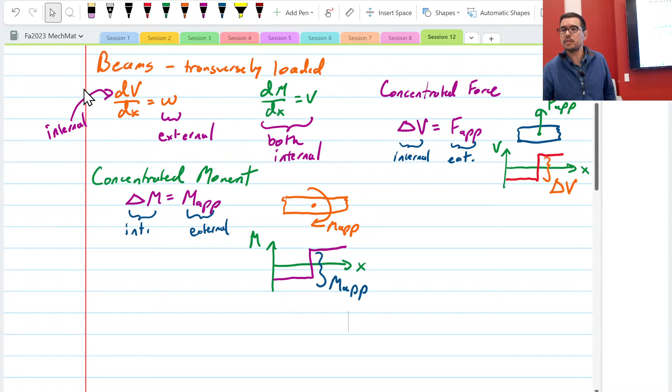This technique allows us to use what we call a graphical method, or we use the differential and integral forms of these equations as we're moving along. Okay, so let's do an example.

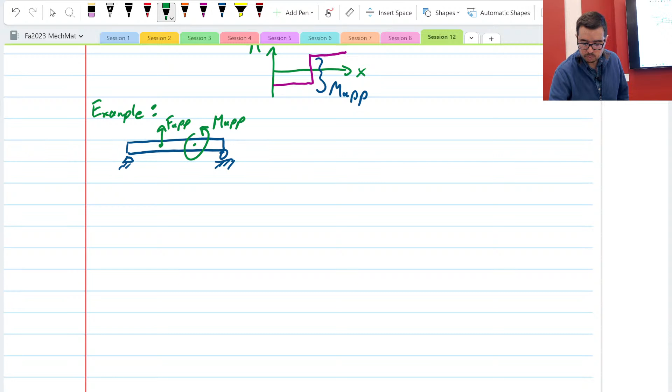This is one of the homework problems, and I might not solve every little detail of it, but it should inspire and help with this approach. Which way? Looks like this is - not completely to scale.

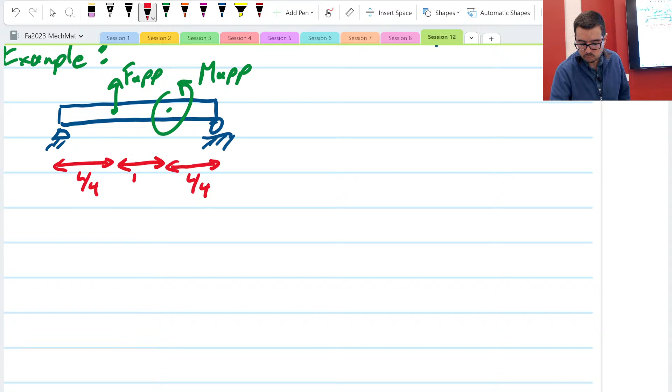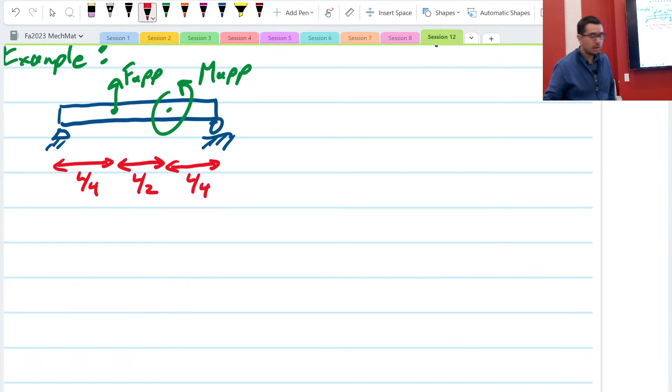So it has length L, and it has a bending moment applied. Notice this is in which direction? Counterclockwise direction. So that means if we look at this formula we have right here, this will have a negative delta M, because it's in the opposite direction. Please note this.

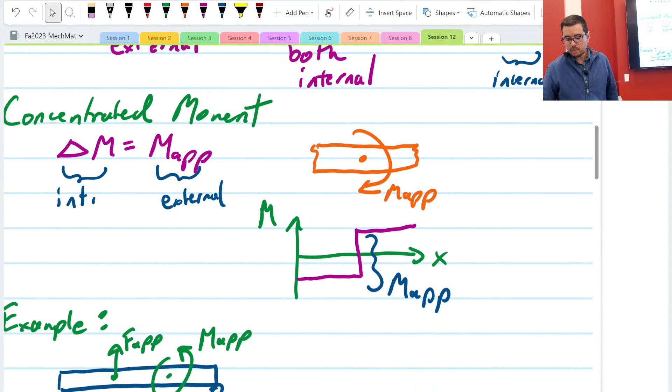Now we also have an F, and this is positive right here. So this will end up giving us a positive jump in the internal shear force.

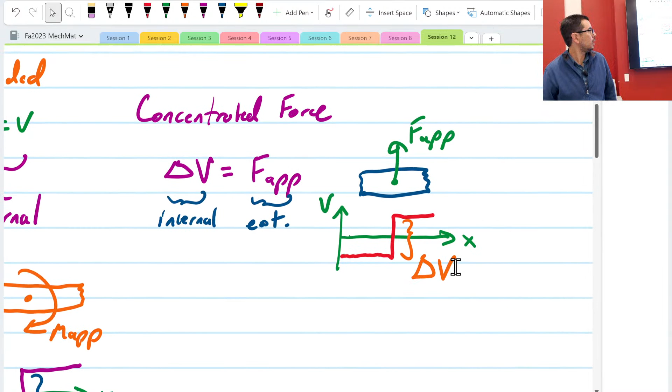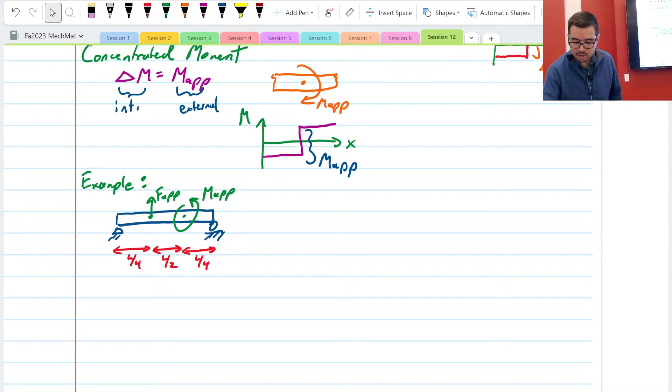Now, how do you start? What do you think? How would you go about starting this problem? What is the first thing we do in statics or mechanics to get to mechanics? What would be the first thing that you do? Yes, Zach - okay, so equation, I like that. So let's look at equilibrium.

Specifically, we're going to look at external equilibrium - that's going to be our first thing here, so we're going to look at it externally. And whether you do this problem with method of sections, or with the graphical method or differential integral equations, you're going to do external equilibrium first. So I'm going to call this reaction RL, and I'm going to call this reaction RR.

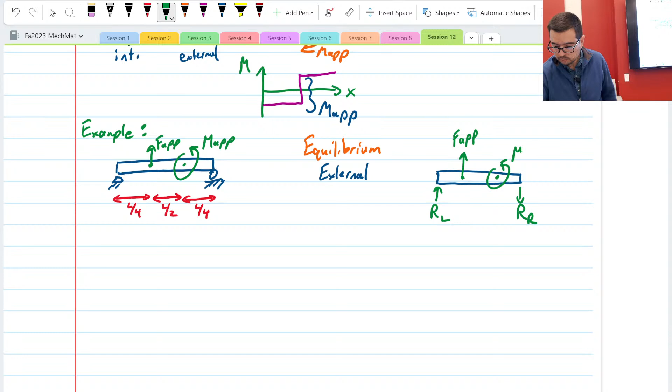And we've got - wow, that's lovely, it's a heart. Why did it do that? Okay. Anything else you want to draw?

Now, do we need a convention here? Do we need to get together and agree? No, all right, we don't really.

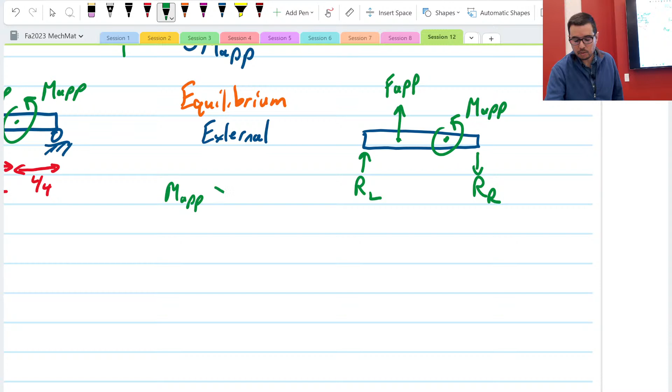Now if you look at the problem in the homework, what you're going to see is that it says something like M applied is greater than - what did I say? - like F applied over 4, yeah. Now this is when we want to just think about things for a minute. I don't really expect us to know the significance of this statement at this point, but it kind of is suggesting that M applied is going to be big and F applied is going to be not so big. And why would I pick RL to be up and RR to be down?

Now you're like, well, is this really sticky? This is just a little roller there, it could pop off. Well, we're going to say the roller can pull it down, okay? Because look, if I apply a moment at this location, what is that? That moment is wanting to pop this right side up and is wanting to push the left side down. So there's no convention, but for the sake of convenience, I'm going to pick RL to be up because I think that's reacting against whatever moment's being applied there, and I'm going to pick RR to be down because I think it's reacting against that moment, because M applied is dominant.

Yes? I don't know if I'm picturing this wrong, but isn't a roller just like a ball? Right, so what I'm saying is we're assuming that this thing can hold it down as well - it's not really, but we're going to assume this is a pinned or roller, and it's not applying a moment, but it is applying a force as a constraint. It's only normal, yes, correct. So how is it just like not attached? That's what I'm saying - we're assuming it can glue it down, if you want. You have a good point, we could put it on the top, but that looks weird, okay. Or we could put one on the top and the bottom - that's doable.

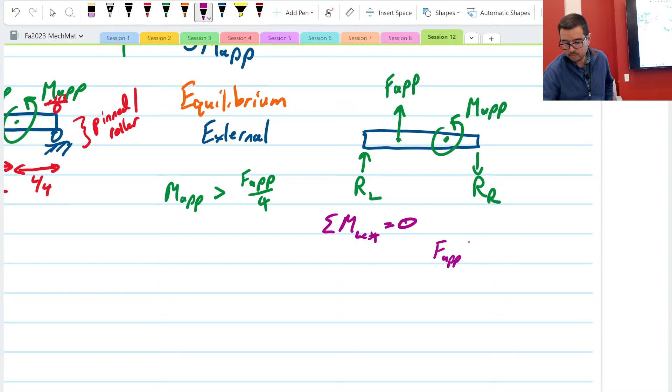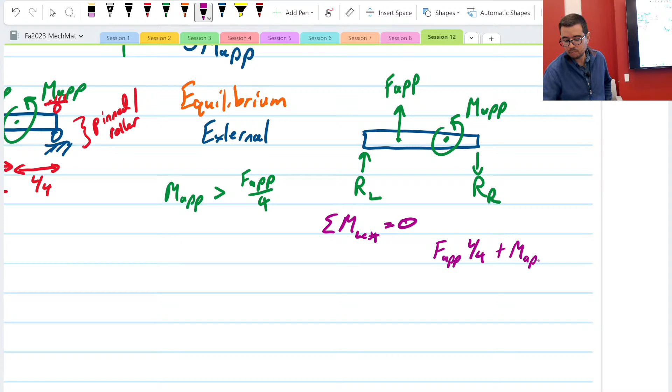All right, so now you tell me what we've got. F times that distance is positive, that's in the same direction as F, which positive is also plus M minus R times that distance.

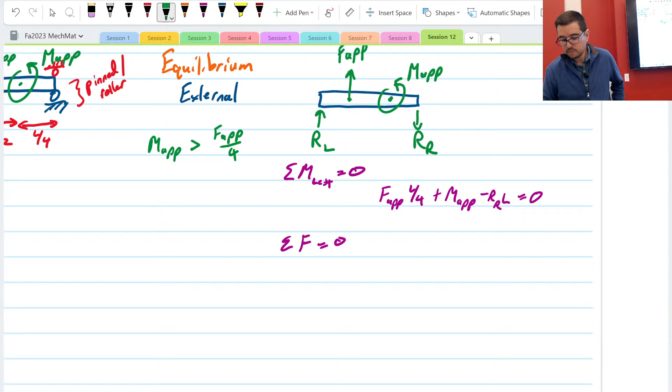Okay, good. Now what else? Sum of forces. Yep, it's just F applied, is that what it said? Yep. Plus RL minus RR. Yeah, okay, good.

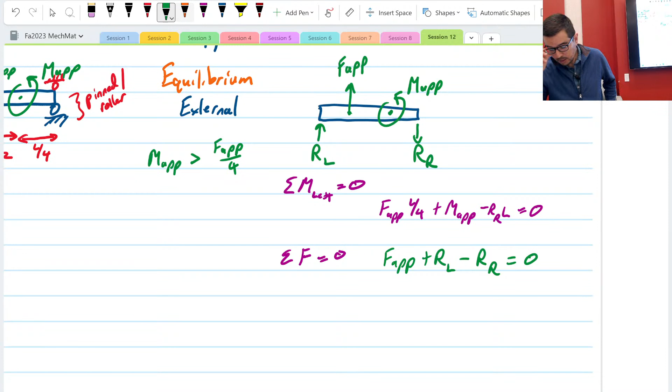So the unknowns are RR and RL, and we've got an equation that tells us RR right here, right? So we can come over here and say that RR is equal to F app times L over 4. Well, actually no, it's F app over 4, right? Because we divide by the L.

Is that good? Okay, and then RL is going to be essentially RR minus F app, right? So that should give us... okay, did I do that right? Or was I wrong? Right, so this was RL.

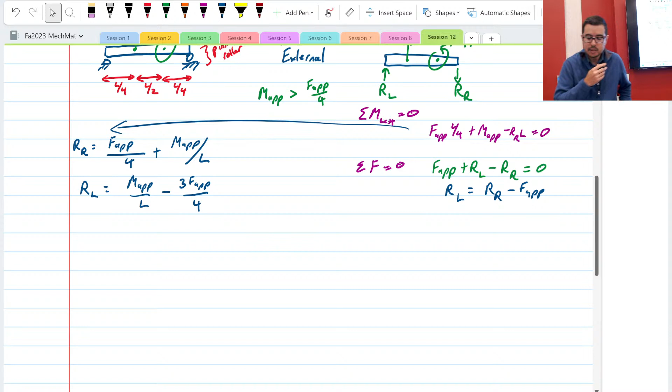Right? We're good? Okay, all right, so now what we want to do is think about how to use our graphical method. So let's use, yes, so...

In the problem, it's like constrained by, RL is like a pin and RR is a roller, right? Yeah, how can a roller like pull down on a pin? We just went through this. We're saying that it can, all right? We're saying it's not a wall, right? It's not applying a moment, all right? But it can. If I had to put another one on top, that's fine, okay.

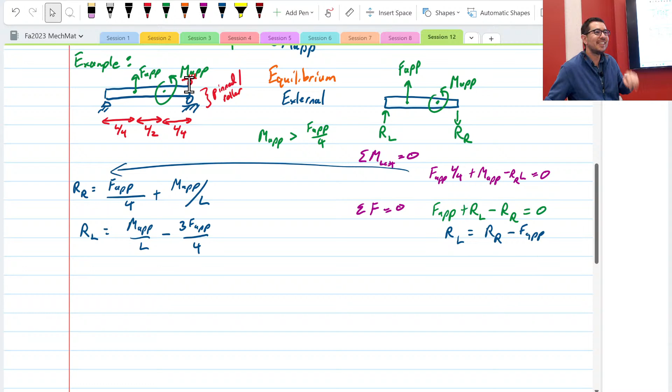All right, so what do we do next? Well, let's use the graphical method, right? So we're going to use the graphical method, the differential integral technique, I guess you could say.

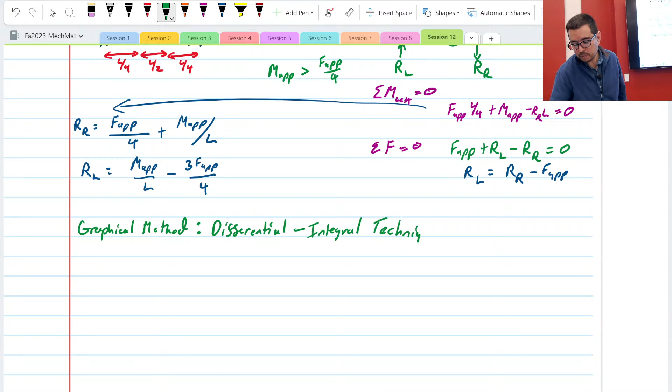And so for doing this, what I'm going to do is doing this. What am I going to do? That's repetitive.

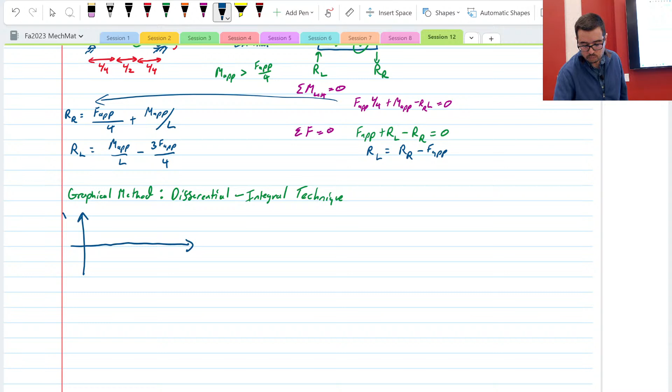I'm going to draw the bending moment and the shear force diagram. The shear force diagram's on the top right, and the bending moment one's on the bottom. Okay? Now it's a graphical technique, but we had to do some math, and we had to do some intuition.

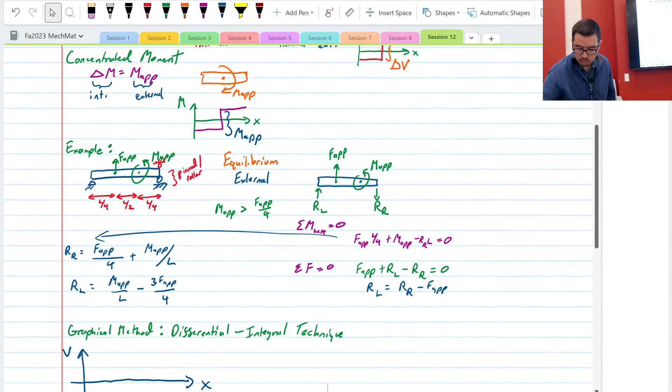What you're going to do, if you look at the video, or the videos, what you'll see is that we are going to think about the boundary conditions. And the boundary conditions are going to be kind of where x equals 0 and x equals L. Okay?

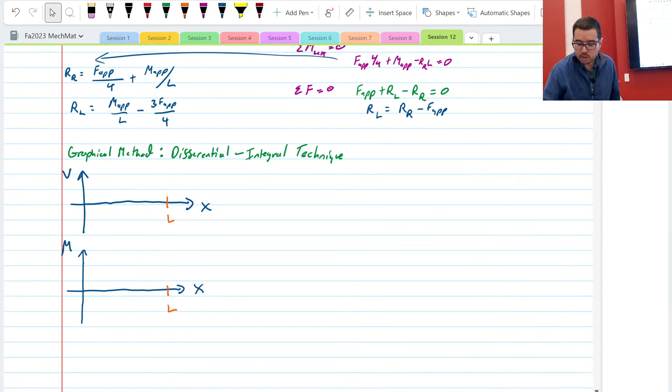How do you do this? What you do is you look at the beam, and we're going to actually use the method of sections, and we're going to look at just what's happening to the right of the left end, and just what's happening to the left of the right end. Okay? So...

Here's our beam, and this is the left side. Okay. Here's the beam, here's the right side. What's going on? We have an RL on the left side, and we have an RR on the right side.

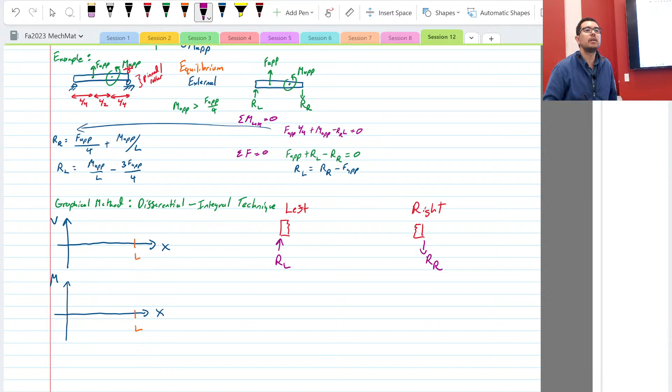This is where we use the convention, because now we're talking about what's happening internally. So what is the convention? Which way do I draw the shear force? Yeah, I'm going to say down, okay, by convention. Which way do I draw the internal bending moment? Yes.

Okay, which way do I draw the shear force on this right one? Up, right? Now that you got one of them, it's usually not so bad to do the other side. Okay? So that's the convention. This means that at the left side, V is equal to RL. Okay? What is M equal to?

Okay, but that little distance is really, really small, dx. It's really, really small. It's 0, we're right at it. So that means that... so this, I see where we're going here, right? This is a really small distance. We're doing the boundary condition. It's right on the boundary.

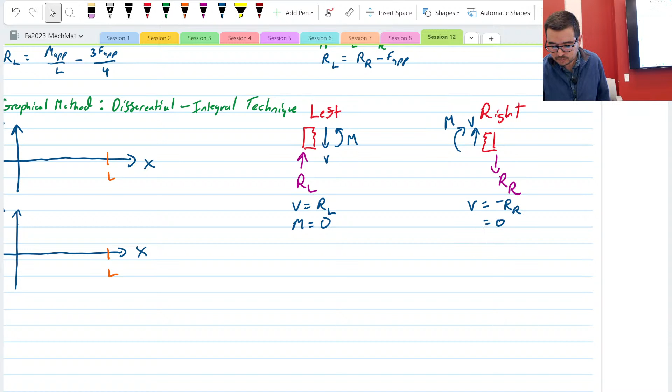There's no distance between RL and where we're taking our M measurements. Yeah, okay, did you say that already? Oh, I didn't hear you. I thought you said dx and not some other complicated stuff. Okay, so, okay, and then what do we do over here? This is V is equal to minus RR, and M is equal to 0. So now we go over to our graph, okay?

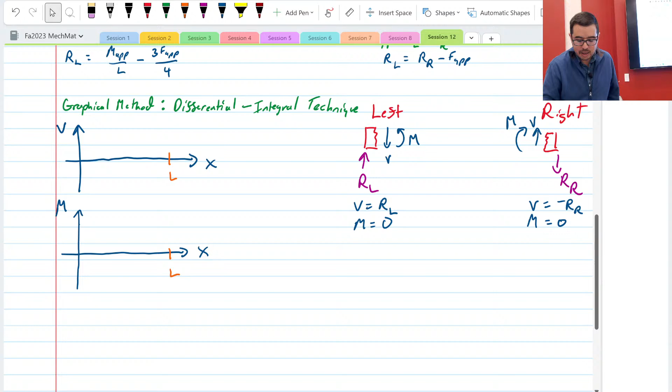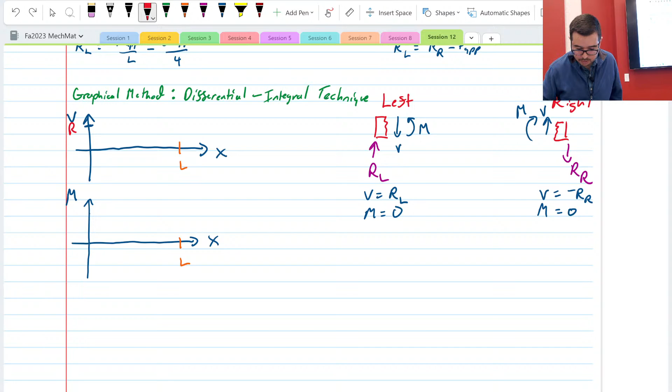And we say, well, we got some information now. We're going to put it up here. We're going to do a... I'm going to use a different color. RL, sorry, RL, and we have that value, that's this one.

Wait a second. Wait a second. Something is not right.

Something is, what did I do wrong here? This is what happens when you go kind of by scratch.

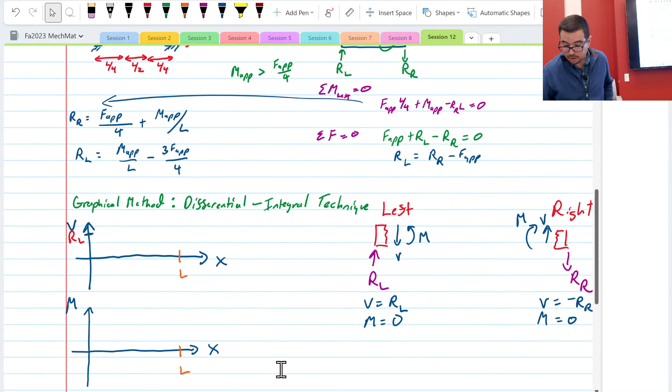Oh, I have different notes here. Wait, hold on, I did it. Well, this should be RL. This should be it, okay.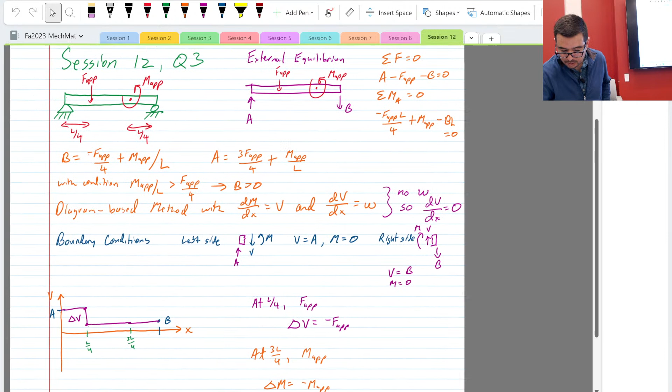I'm going to look at what I did yesterday. Yeah, this, why did it work out? Oh, slam. I drew the problem wrong. This is different. Okay, it's okay. It's okay, but it's not okay.

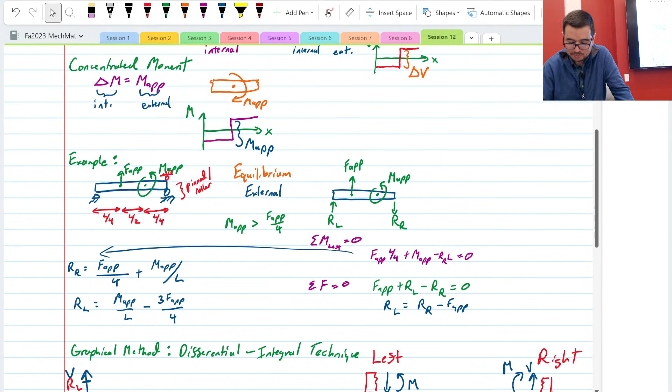All right, we have two decisions to make. We have one decision to make.

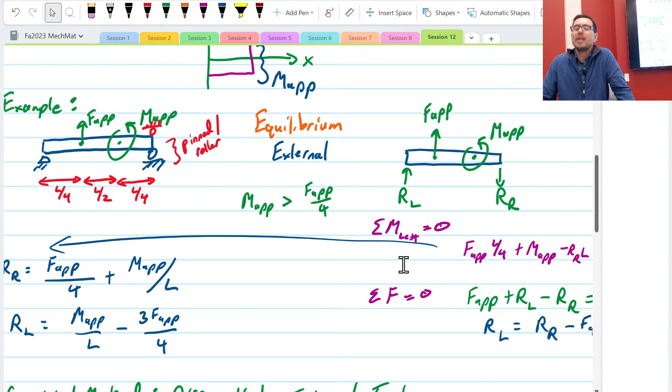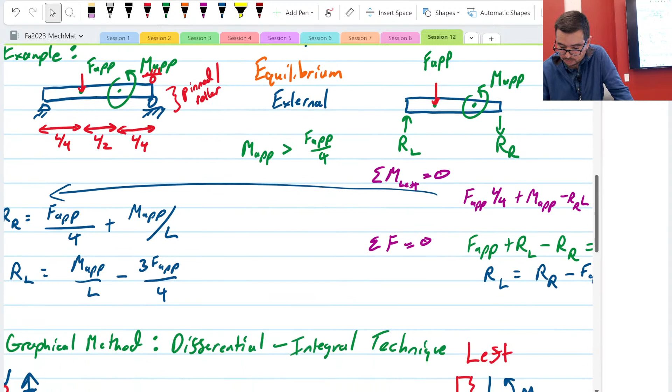Okay, we've just changed the problem.

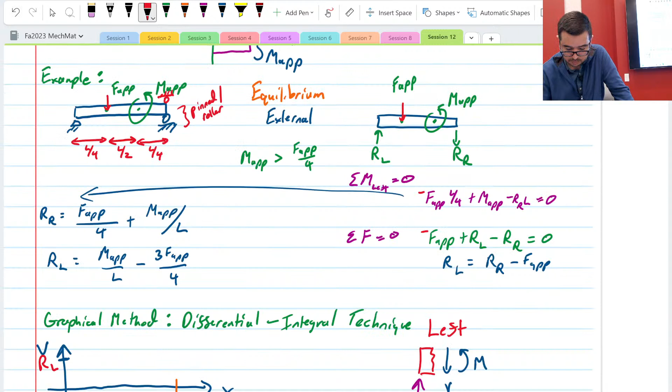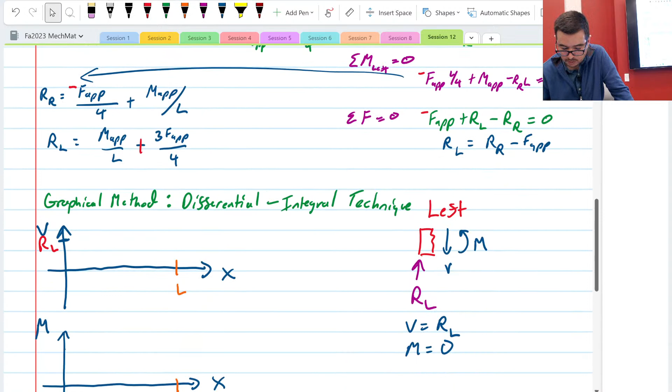Okay, that allows us to keep, this allows us to do the same problem that's on the homework. All right, so it's like, okay, we could keep going through this, or we could just fix it here so that it's the same problem as in the homework. All right, sorry about that.

So RL, it doesn't change anything here, but RL is here, okay, and the moment is 0 here, okay, on the left side. If we go to the right side, we have v equals minus R R, which is going to be down here. So let's put this right here.

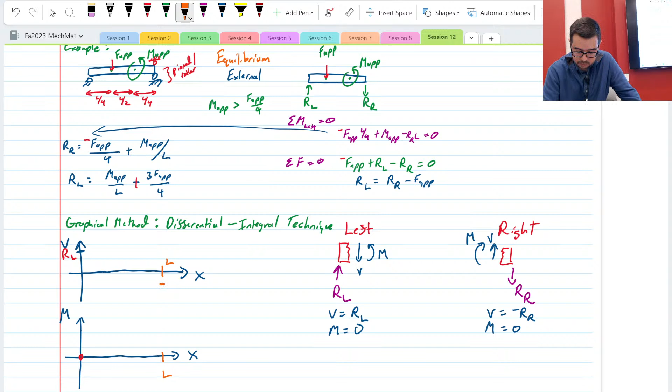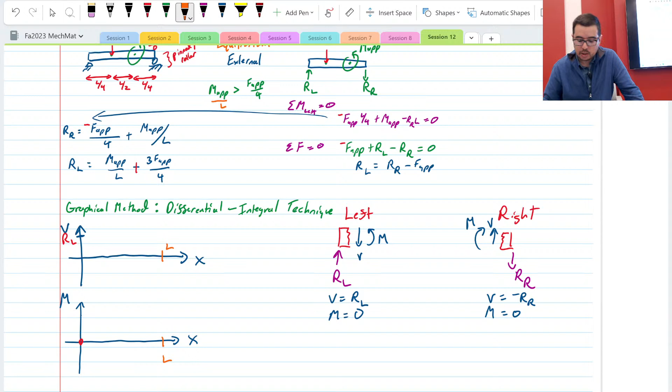Okay, and this, actually, I'm not going to do that. I'm going to say, so look, we said, so v equals minus R R. We said that m app over L, okay, is greater than f app over 4, all right? So that means, okay, that, well, I'll make sure I got this right.

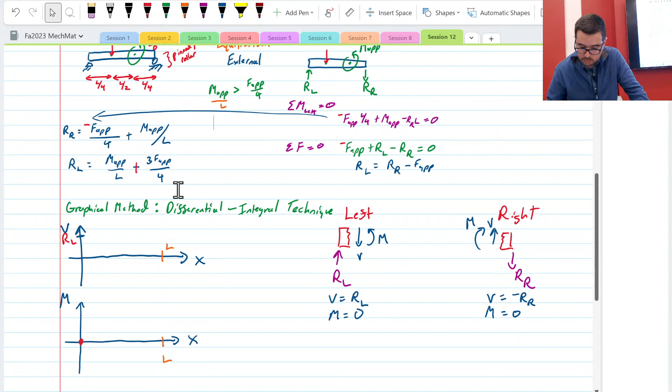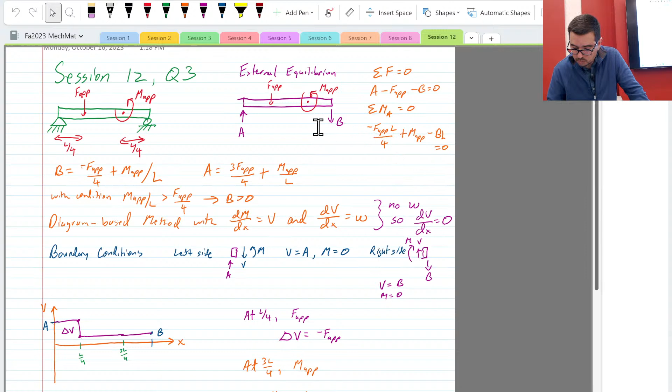RR, B, F app, okay. This is a positive, this is going to be positive, this is going to end up being okay.

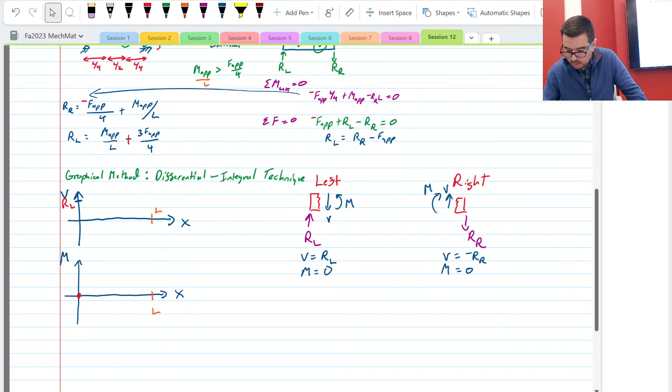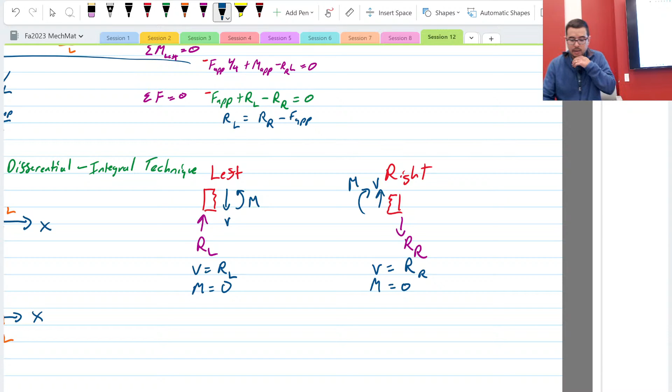Goodness, how many different mistakes can I make? Okay. Is that good? V equals RR, not minus RR. Okay? And so that's going to put, and this, we said this is greater than this, so this is going to make it positive still. Okay?

All right? Like that. Any questions? And this one is 0. Okay, any questions on that? Yes.

On the left side? No, because they're still opposite. Right? When we did the equilibrium, they're opposite. Guys, so thank you, right? This is good. You gotta fact check me, all right? I also have the responsibility to do it right.

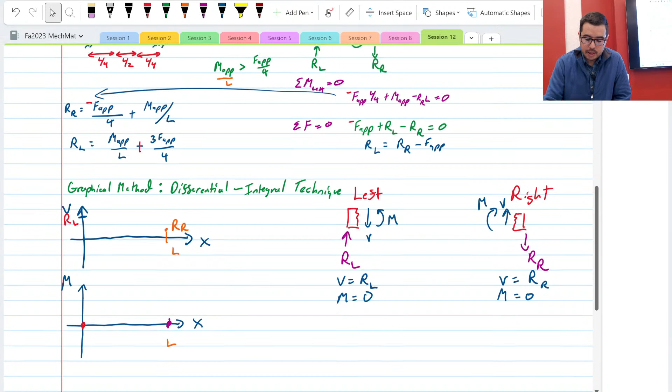Okay, so now, what's happening in between? Okay, what's happening in between? That's the question. Okay, so if we look back at the problem, there's no distributed force between the left end and where we get to L over 4. Do you see that? There's nothing distributed here.

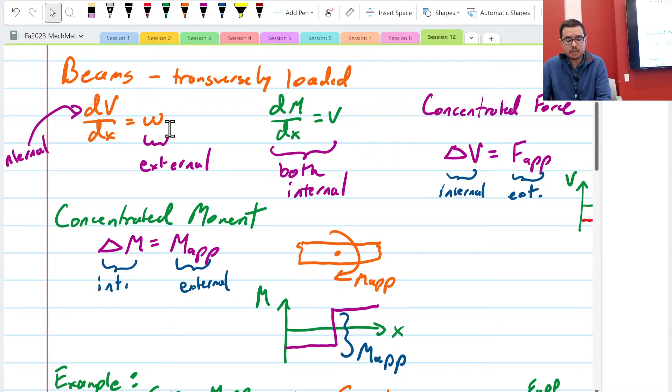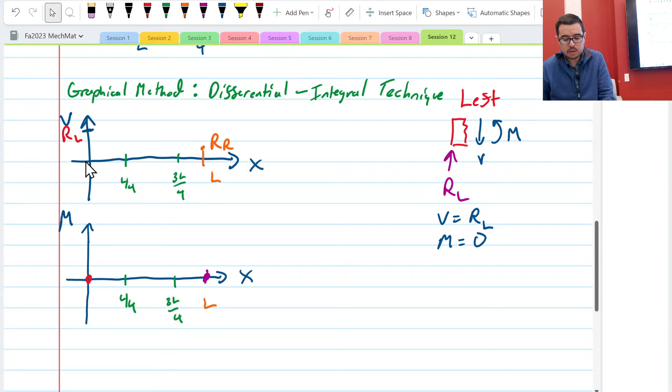And we have this equation up at the top, right? dV dx is equal to an external distributed force. So when we look at what's happening from this region to this region, if dV dx, so from x equals 0 to L over 4, we have dV dx is equal to w, but this is equal to 0. So if dV dx is equal to 0, what does that say about the slope of that line?

Flat, horizontal, good. So that's it, okay? Now, the other equation, right, is that dM dx is equal to V. So the integral, right, so if we do the integral, right,

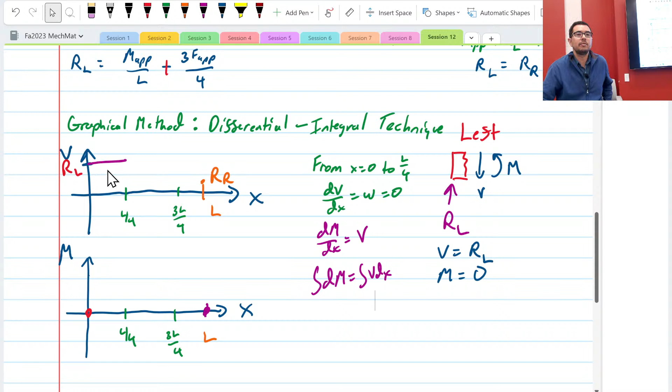We get this. So we've got to integrate this expression from here to here. And what's the integral of a flat line? Okay, yes, and that's true, okay. And what shape, what's the slope of that? Slope. So what's the slope of the line going to be here? 0.

No, the slope is RL, right? So it's a first order, right? We go from 0th order to first order, okay? And like you were pointing out, the value here, so we go up to this value, that value is, yes, the area of this, right? So this is going to be RL times L over 4, okay? And it's going to slope like that, okay? It's a line. If you have a first order and you had to integrate it, what does that become? Parabola. There you go. Second order, right? Parabola. Okay, so we've gotten to L over 4.

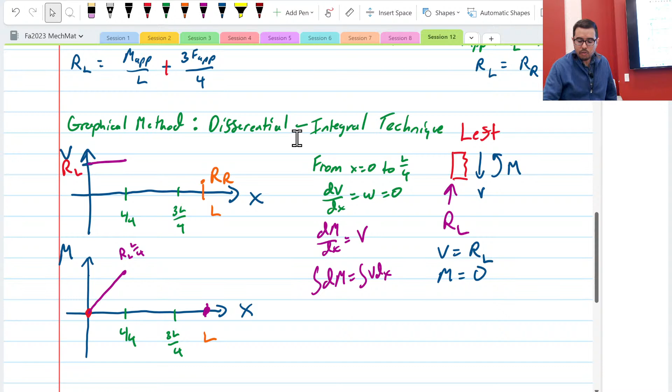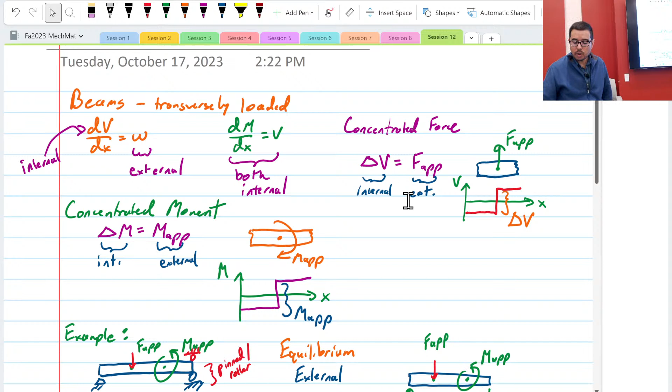Now, at L over 4, there is the applied F-app. Okay? F-app is downward. All right? Downward means that it has a negative, or has a delta V that's negative. Okay? So it's going to drop by this F-app. Okay? So it's going to drop down.

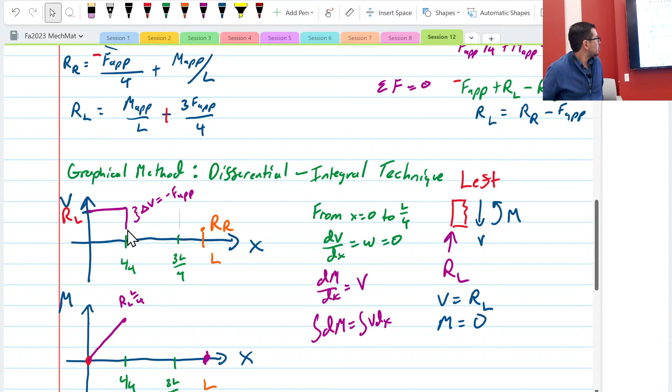And let's just say F-app. Okay? What happens from L over 4 to 3L over 4 in terms of dV dx?

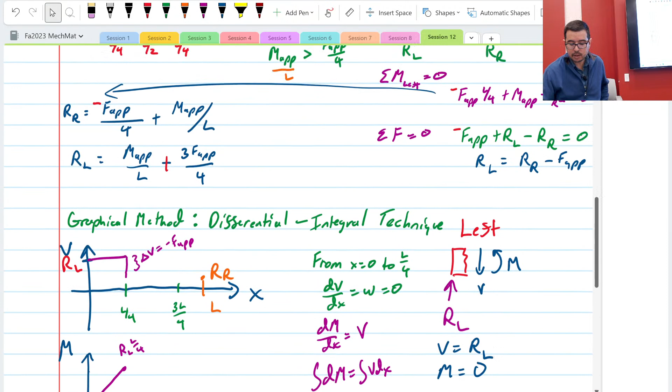Equals 0 again. What happens from x equals 3L over 4 to L? If we go back to the drawing, there's this M applied, but there's no distributed force applied. So it stays 0 as well.

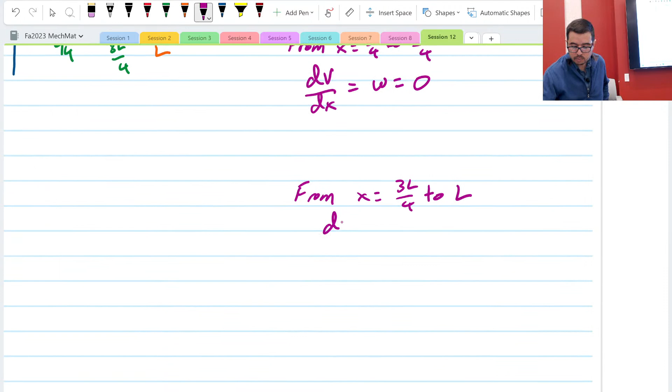So what we can see is that this, just like it was here, is going to be another flat line. And so when we go from here to here, we just go with a flat line all the way to the end. Let's do it with a different color. Like that. Any questions on that?

Now, what is happening from L over 4 to 3L over 4 with the moment? Well, we write the same equation again. dm dx is equal to v. Well, what is v equal to? Well, v is equal to this RR.

And that means it's going to have another slanted slope. It's going to be first order. But RR is less than RL. So the slope will be less, right? So we're going to get to some point over here, and the slope is going to be less.

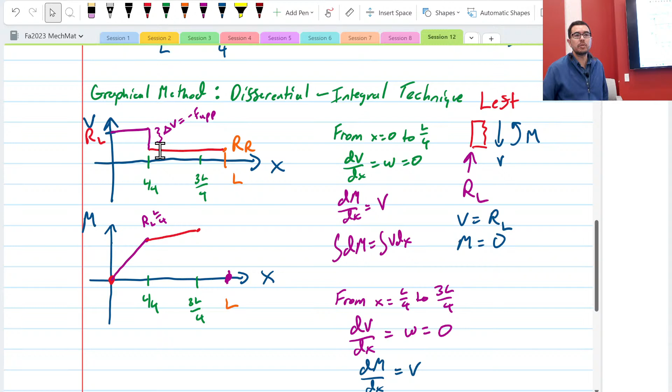Yes? That vertical region on the V is not differential. How would that be, is that like an open dot? Yeah, well that's what we're talking about. This is the coupled force, right? The external applied force, the concentrated force. And that's where we get this discontinuity.

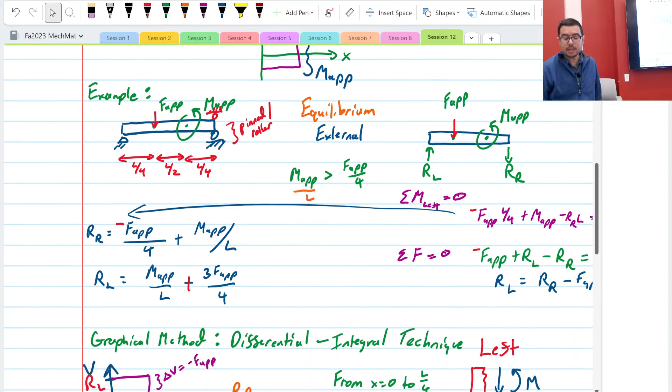Right here. Okay, but how are we just assuming that it's continuous? Yeah, we're assuming there's a jump, so it's discontinuous. And it jumps from, just left of L over 4, it's here, and then just right... I'm still going to draw a line though, connecting the two. So this slope is less, we get over here, all right?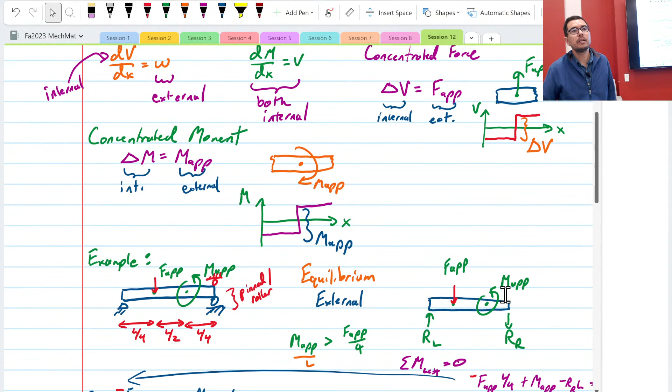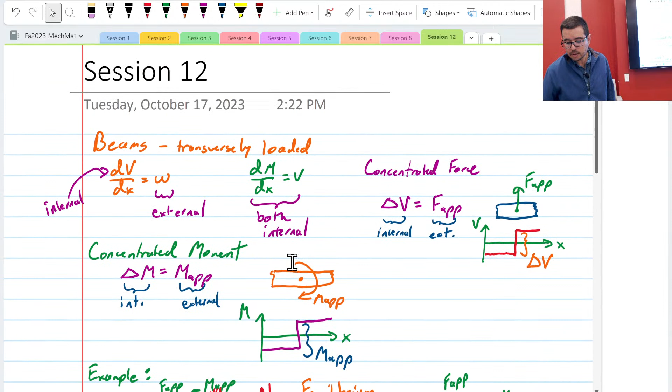And what happens at 3L over 4? We have our M applied. And so, we have a delta M, and is this a positive jump or a negative jump? Well, according to our convention, this would be a positive jump, but it's going the opposite, so it's a negative jump. This one is going this direction, so it's a negative jump. So delta M is equal to minus M applied, which means we've got a drop, okay?

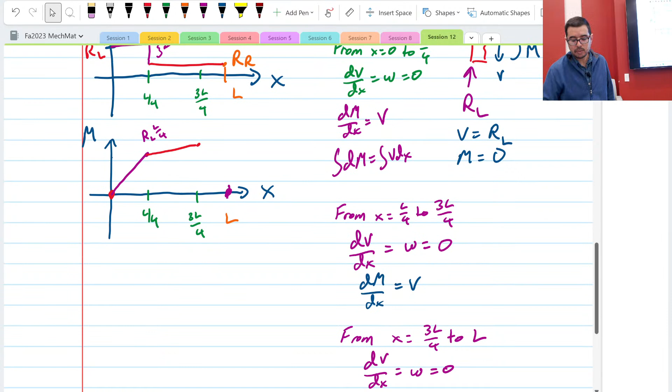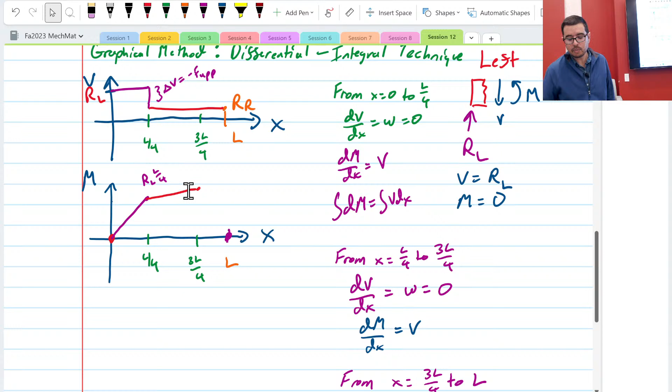But we've got to get back to 0. And the slope over here is the same as it was here, positive. So this is a little bit of a nuanced thing. But what it means is that we drop down, and this is going to be a minus, so delta M is equal to minus M applied, and then we're going to have the same slope.

That's not actually that good. Let me do it a little bit better. I want to make it parallel to this. Okay, like that. Okay, because this slope and this slope both are RR.

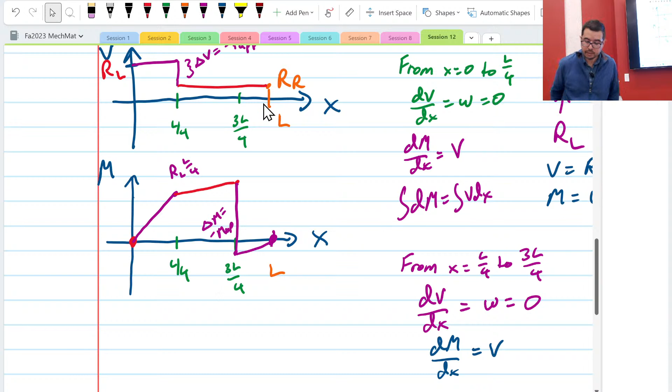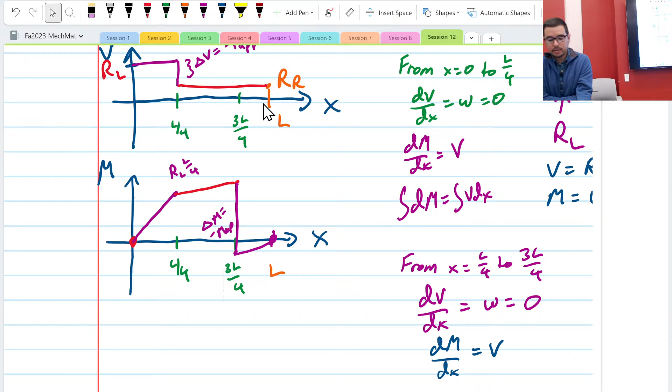Yes, Kevin. So, just to summarize, from the graph of V, you were able to derive the slope for M from 0 to 3L over 4. And then the reason why it drops from the orange section of V down to below the x-axis is because there's a moment that you specify in the question, where delta M is equal to minus M applied. So that's why you drop all the way down, and then rise again with the same method that you used for the first two sections.

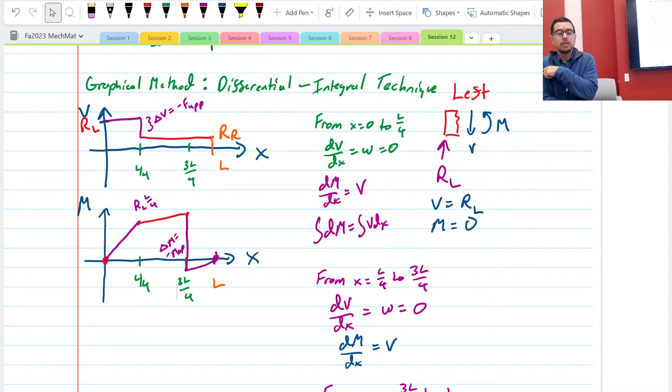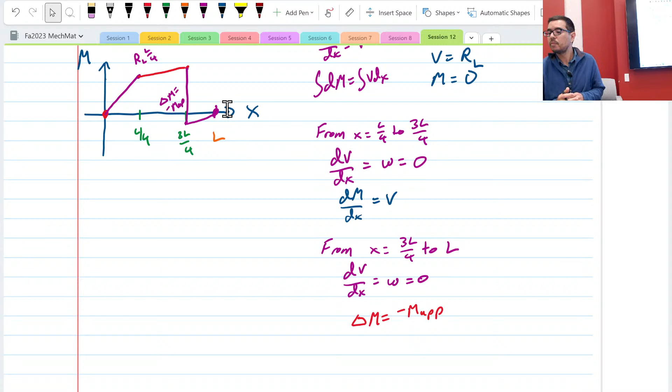That's right. I mean, if you calculate out, if you have numbers, and you calculate M applied, or you're given M applied, it will do exactly this. It will drop it below and make it negative. The two other sections, there's no M applied. There's no M that you can use delta M with, because the only instance where there's a moment applied is at that point that you specified, right? So you can't use it elsewhere, yes.

So let me say something a little bit broader. A concentrated force does not lead to a discontinuity in the bending moment. It leads to a change in the slope at that location, but it does not lead to a discontinuity in the bending moment, just a discontinuity in the first derivative.

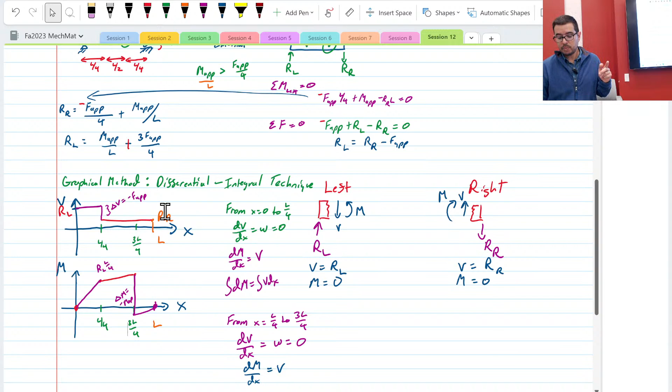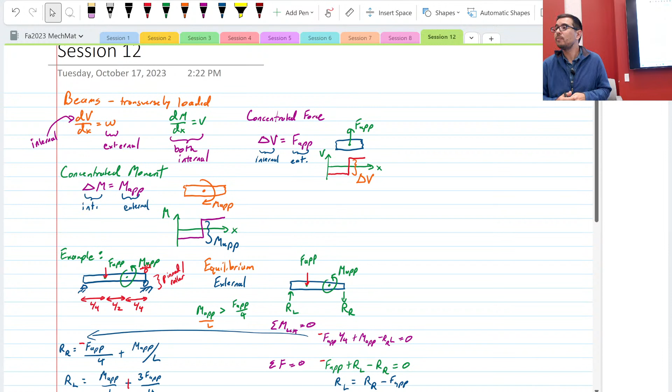A concentrated moment doesn't affect shear, internal shear force. In fact, it doesn't affect it at all, because dm dx is equal to v, but v doesn't care about m. All right, so that should save some time on, I think it's the third question for the homework.

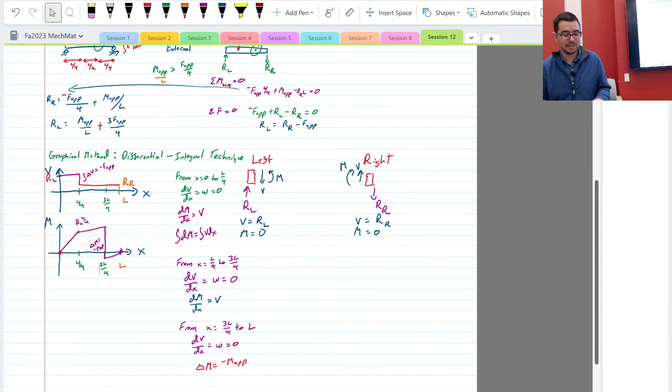Yeah, I got hung up because I put this F applied the wrong direction, and that made our lives a little bit tricky. Would it have made the problem more solvable? It would, no, the problem would have still been solvable, but the condition that I posed, that M applied over L is greater than F applied over 4, wouldn't have had significance, and it wouldn't have matched your homework problem. Oh, that's nice, okay, for those reasons. Okay, go for it.

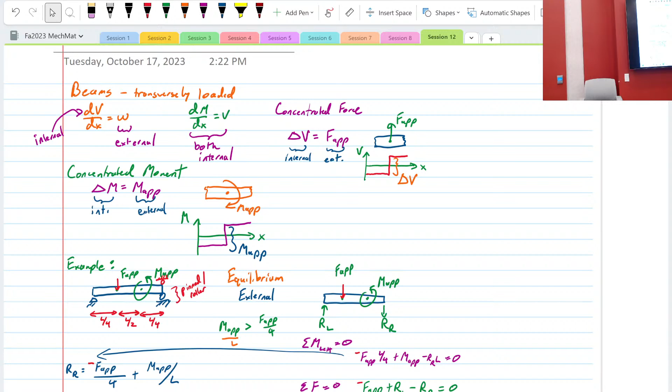Yeah, what's up? Oh no, yeah, it's okay. There it is, it's added. Yeah.

This is Rebecca, same engineering. I don't know, she was in the workshop. Oh, yeah.